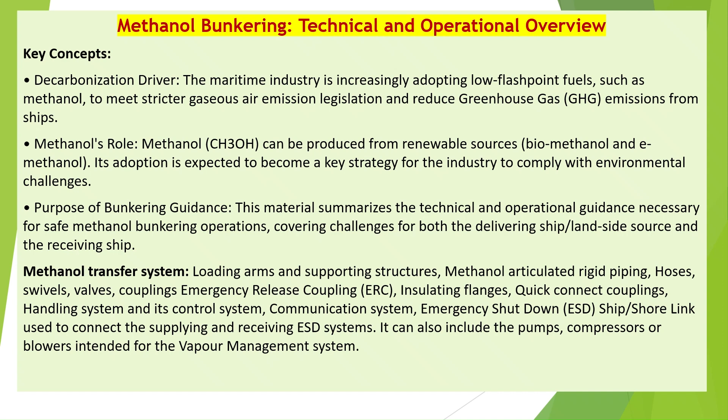Methanol properties and onboard storage. Key properties. Chemical form. Clear, odorless liquid, CH3OH. It is water-soluble and biodegradable. Flammability. Methanol is highly flammable with a low flash point of approximately 12 degrees Celsius. The flammable range in dry air is wide, at approximately 6 to 36.5%. Flame characteristics. Methanol burns with a flame that is nearly invisible in daylight and produces no smoke.

Energy density. Its energy density, 15.7 megajoules per liter, is significantly lower than conventional fuel oils, meaning approximately 2 to 2.5 times more storage volume is needed for the same energy content. Clean burning. It has cleaner burning properties, enabling reduced exhaust emissions like sulfur oxides, SOx, and particulate matter, PM, and emits less nitrogen oxides, NOx, than conventional fuels. Toxicity. Methyl alcohol is classified as toxic by the IMO's International Code for the Construction and Equipment of Ships Carrying Dangerous Chemicals in Bulk, IBC code.

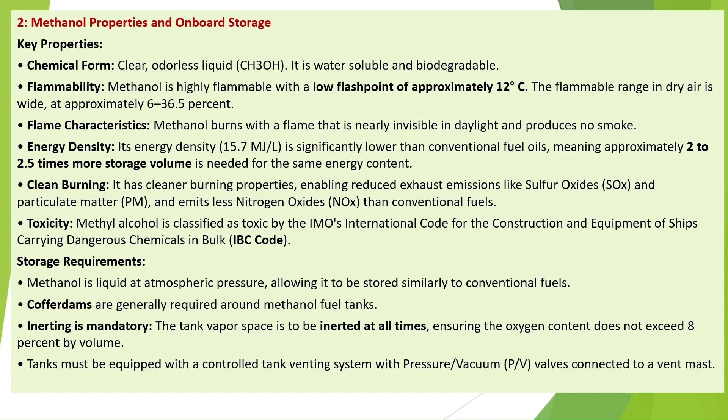Storage requirements. Methanol is liquid at atmospheric pressure, allowing it to be stored similarly to conventional fuels. Cofferdams are generally required around methanol fuel tanks. Inerting is mandatory. The tank vapor space is to be inert at all times, ensuring the oxygen content does not exceed 8% by volume. Tanks must be equipped with a controlled tank venting system with pressure/vacuum, P/V, valves connected to a vent mast. Key properties of methanol are displayed for ready reference.

Methanol fuel tanks. A main advantage for methanol as fuel is that it is liquid at atmospheric temperatures and pressures and thus can be stored in conventional tanks on board. Generally stored in integral tanks, although independent and portable tanks may also be acceptable. Methanol fuel tanks should not be located in accommodation spaces or machinery spaces of Category A. Furthermore, cofferdams are required around methanol fuel tanks, except because methanol mixes readily and is biodegradable in water, methanol tanks can be stored next to the shell plating below the lowest possible waterline.

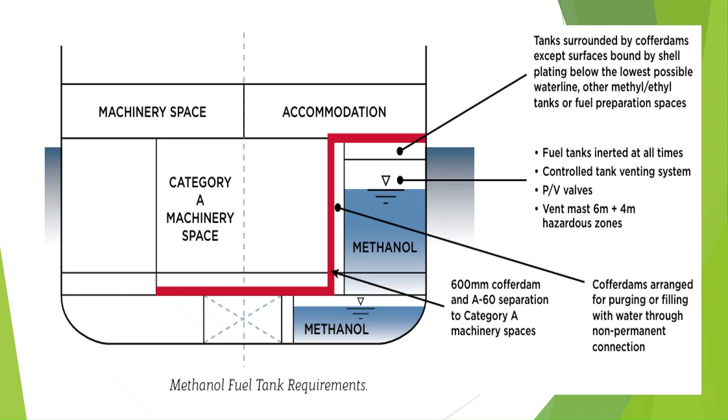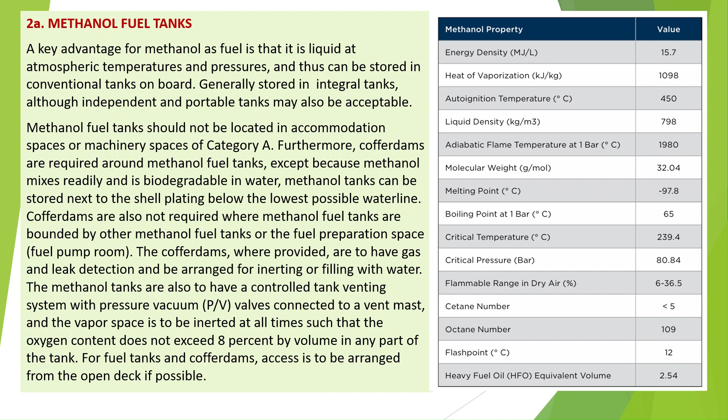Cofferdams are also not required where methanol fuel tanks are bounded by other methanol fuel tanks or the fuel preparation space, fuel pump room. The cofferdams, where provided, are to have gas and leak detection and be arranged for inerting or filling with water. The methanol tanks are also to have a controlled tank venting system with pressure vacuum, P/V, valves connected to a vent mast, and the vapor space is to be inert at all times such that the oxygen content does not exceed 8% by volume in any part of the tank. For fuel tanks and cofferdams, access is to be arranged from the open deck if possible.

Regulatory and safety frameworks. Methanol, as a low-flashpoint fuel, is primarily regulated under the International Maritime Organization framework via the IGF Code of Safety for ships using gases or other low-flashpoint fuels. The international ship safety requirements are mainly based on the MSC.1/Circular.1621 Interim Guidelines for the Safety of Ships Using Methyl/Ethyl Alcohol as Fuel, adopted November 2020. The IBC code provides the initial basis for many safety requirements related to carrying methanol in bulk.

Environmental compliance. MARPOL Annex 6 details regulations for the prevention of air pollution. The fuel supplier must document the fuel quality, sulfur content, in the Bunker Delivery Note, BDN. The supplier should also document the carbon factor, CF, especially if the methanol is derived from non-fossil sources.

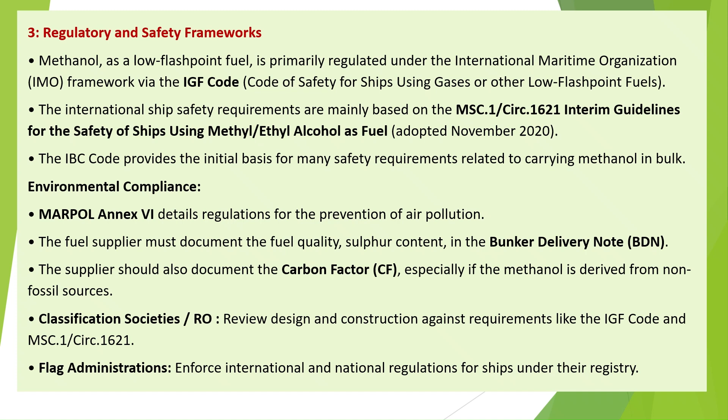Classification societies/RO review design and construction against requirements. Flag administrations enforce international and national regulations for ships under their registry. Main bunkering methods. 1. Truck-to-ship bunkering, most commonly used method currently.

2. Ship-to-ship or barge-to-ship bunkering. Fuel is provided from a bunker supply ship to the receiving ship. Advantages: high flexibility, high bunkering rates, and high volume. 3. Terminal-to-ship bunkering, using a fixed pipe or hose connection from a land storage tank. Advantages: bunkering directly at berth, high tank capacity, fast bunkering.

Bunkering interface and compatibility. A pre-bunkering verification is critical to confirm compatibility between the supplier and receiver. Equipment. Hoses and connections must be certified for methanol use and inspected periodically. Electrical safety. Earthing, bonding wire of the truck/ISO tank and ship is necessary to protect against static electricity, which is an ignition source.

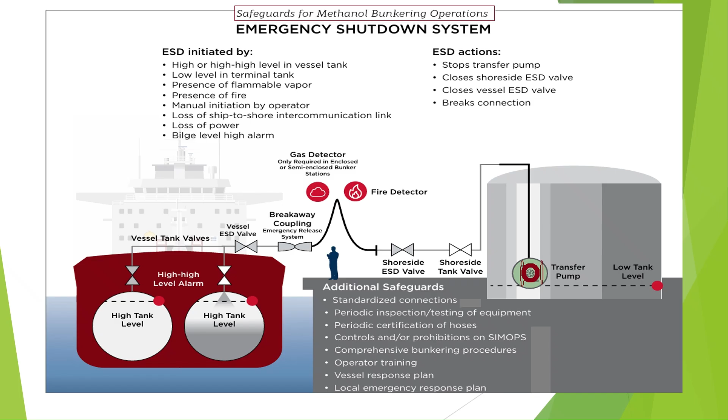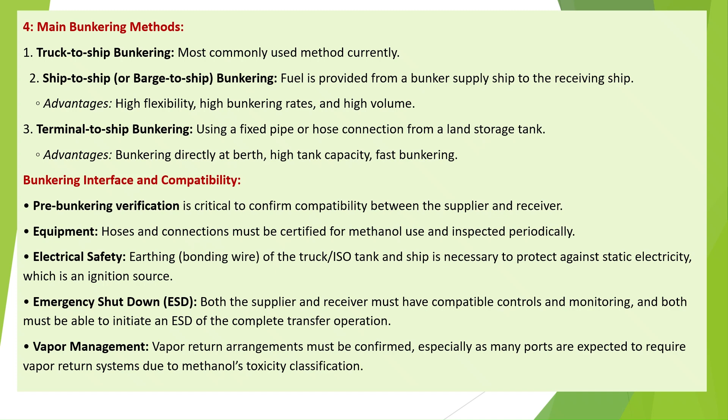Emergency shutdown, ESD. Both the supplier and receiver must have compatible controls and monitoring, and both must be able to initiate an ESD of the complete transfer operation. Vapour Management. Vapor return arrangements must be confirmed, especially as many ports are expected to require vapor return systems due to methanol's toxicity classification.

Hazards and mitigation during bunkering. 1. Explosion and fire risk. Methanol liquid and vapor are highly flammable and easily ignited. Its vapors are heavier than air, relative vapor density 1.11, and can accumulate in low-lying areas. 2. Toxicity risk. Methanol is toxic. Exposure occurs via inhalation, ingestion, or skin absorption.

Ingestion can lead to severe health issues, including vision loss or death, as it oxidizes in the body to produce formic acid and formaldehyde. Allowable occupational exposure limits are as low as 200 ppm TWA. TWA is a time-weighted average, which is an occupational exposure limit that represents the maximum concentration workers can be exposed to over an 8-hour workday without risking adverse health effects.

3. Corrosion risk. Methanol is corrosive to certain materials, requiring methanol-compliant equipment for bunkering. Key mitigation measures. Fire detection. Since the flame is nearly invisible in daylight, fire detection systems must be suitable for methanol fires, typically combining smoke detectors with detectors that can effectively detect methanol fires, e.g., approved infrared, IR, flame detectors. Thermal cameras are also used.

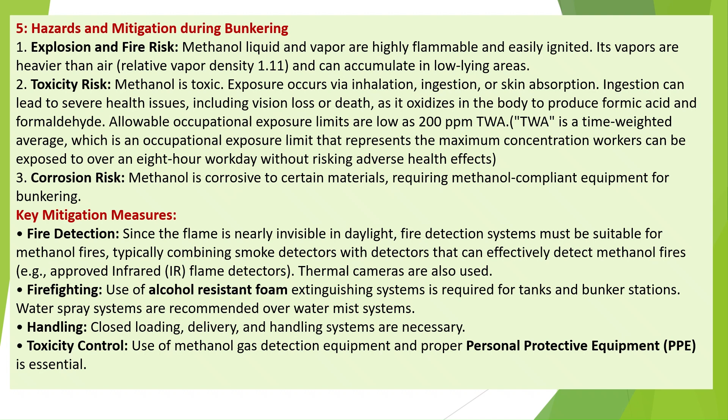Firefighting. Use of alcohol-resistant foam extinguishing systems is required for tanks and bunker stations. Water spray systems are recommended over water mist systems. Handling. Closed loading, delivery, and handling systems are necessary. Toxicity control. Use of methanol gas detection equipment and proper personal protective equipment, PPE, is essential.

Operational procedures and final safety steps. Before starting, the supplier and receiver must agree on the transfer procedure, ensuring compatibility between their respective manuals and systems. Key operational documents include the Methanol Fuel Transfer Systems Operation Manual and Emergency Manuals.

Operational roles and training. A person in charge, PIC, must be appointed by both the supplier and the receiving ship to manage the operations, communication, and emergency response. All personnel involved require formal training, which covers basic methanol handling, technical safety, operational risks, firefighting, and emergency management.

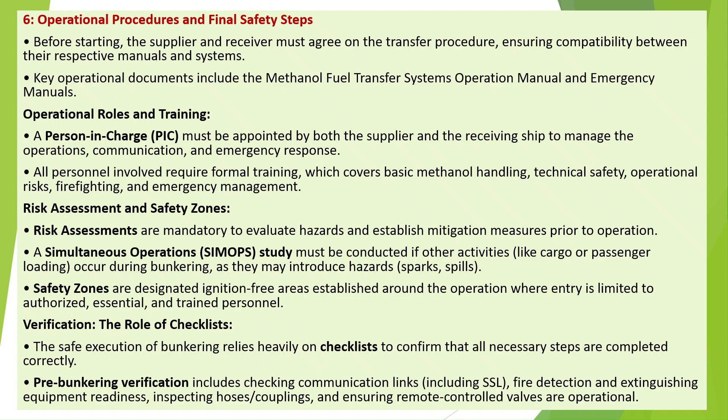Risk assessment and safety zones. Risk assessments are mandatory to evaluate hazards and establish mitigation measures prior to operation. A simultaneous operations (SIMOPS) study must be conducted if other activities, like cargo or passenger loading, occur during bunkering, as they may introduce hazards, sparks, spills.

Safety zones are designated ignition-free areas established around the operation where entry is limited to authorized, essential, and trained personnel. Verification. The role of checklists. The safe execution of bunkering relies heavily on checklists to confirm that all necessary steps are completed correctly.